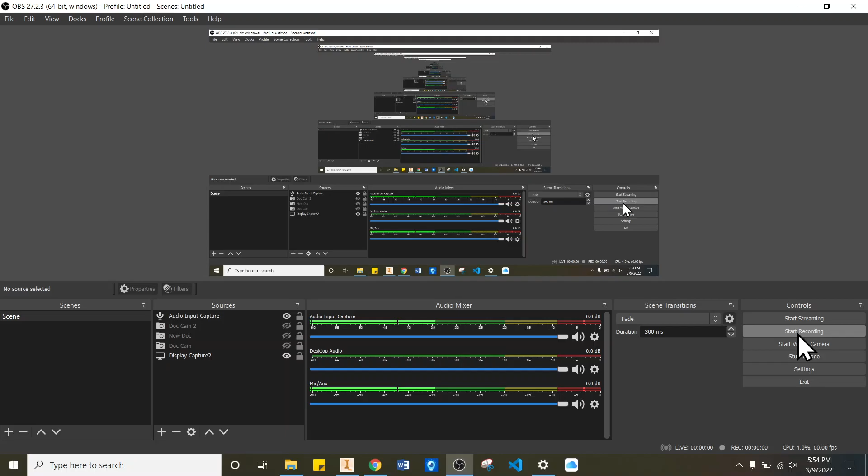Okay, so we are going to review a little bit on how to make an assembly in Inventor. First things first, when you open it up, we're going to start a new file, an assembly right here, or if you already had it open, you can go File, New, Assembly. That works too, so either way.

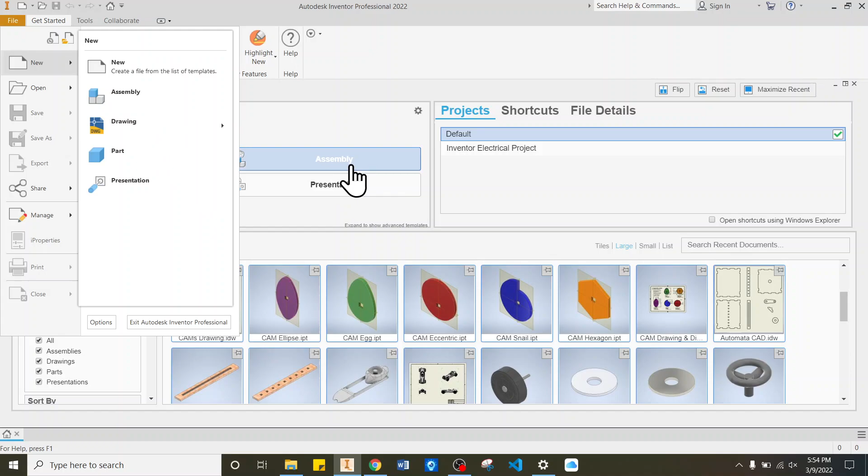Once it gets opened up, it'll take a minute the first time. Maybe more than just a minute.

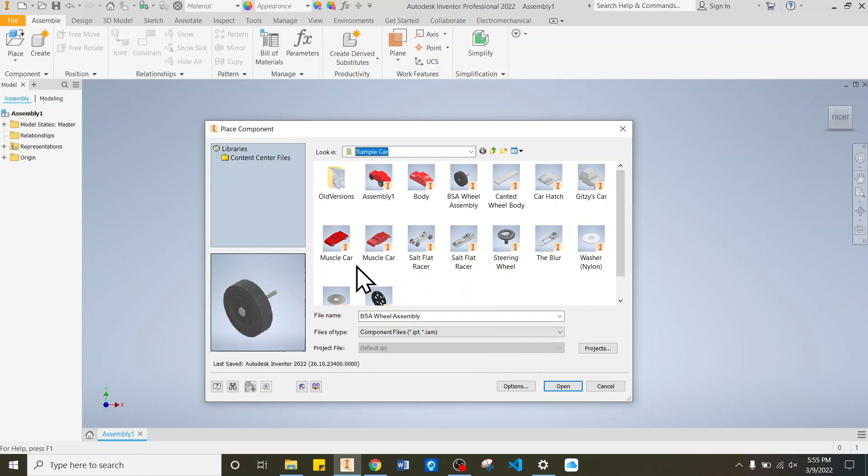Okay, so what we're going to do here is, we're in the assembly file, and we've got to put all the parts in here that we need to use. So I'm going to say Place, and I'm going to say the top one right there, Place, and it should take me to folders right here so I can find where all my parts are. I'm going to put this one together right here. It's a pretty simple one, so I'll say Open, and I can click and right click and say OK.

So that's going to drop in just this sample car. Kind of looks like Lightning McQueen a little bit. So I'm missing my axles and my tires.

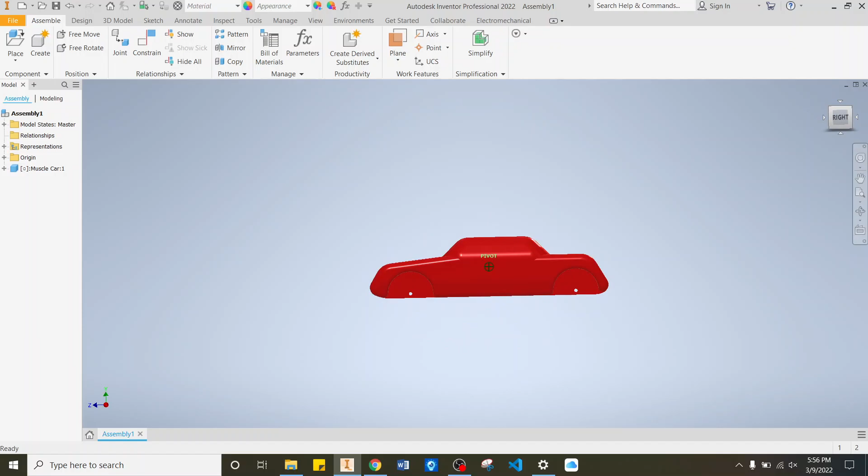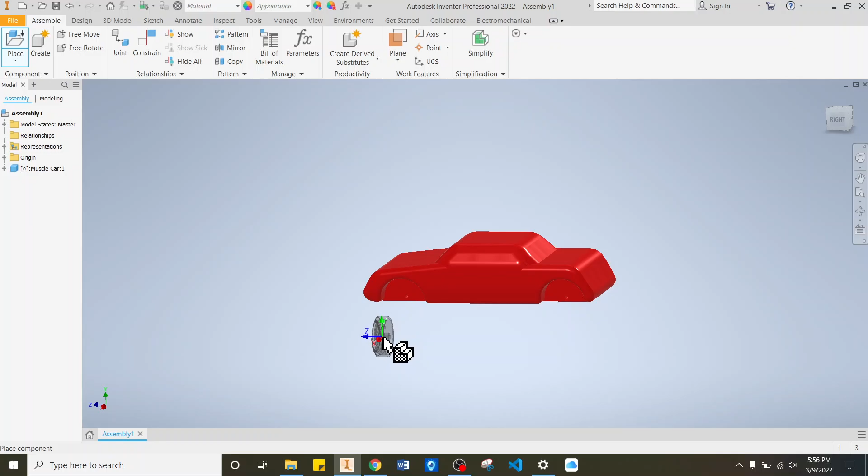So I'm going to go up here and say Place again, and I put those in another folder. I've got my standard car wheels. Most of you are going to be using the BSA wheels - these are the ones that are Boy Scouts of America, standard Pinewood Derby car wheels. I'm going to place this here, here, here, and here. Right click, OK. Then I also want to add in my axles.

So I'm going to say Place, and I want the 1-inch axle. Open. I'm going to go 1, 2, 3, 4. Right click, OK. So now I've got these wheels floating around in space with their axles.

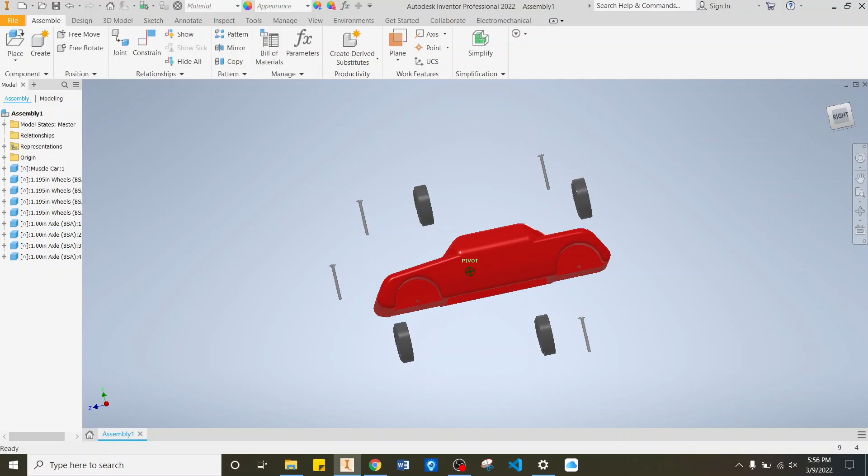What I'm going to do for each of these is insert these axles into the wheel. So I'm going to go up here to Constrain, say Insert. I'm going to zoom in, so I'm kind of looking underneath this just a little, and I want to click right there, so kind of where the flange meets the shaft there. So I'm going to click that, and I'm going to click right here.

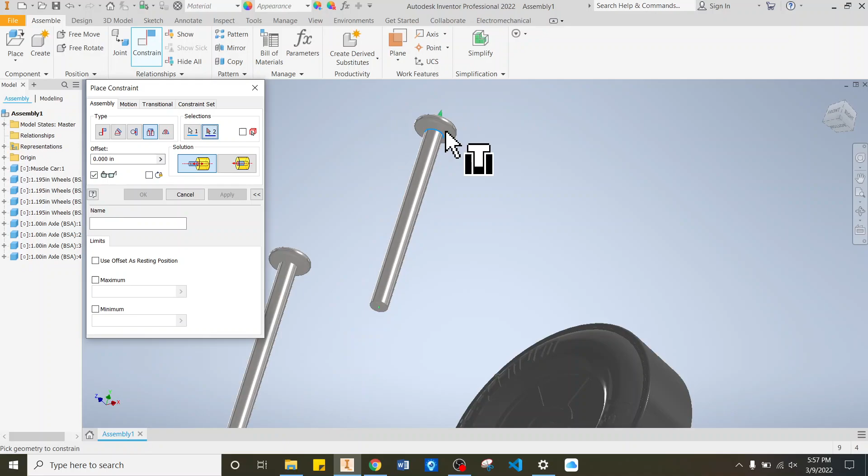Notice mine's upside down. If that happens to you, just flip it over like this, flip, and then click Apply. So there's the first one.

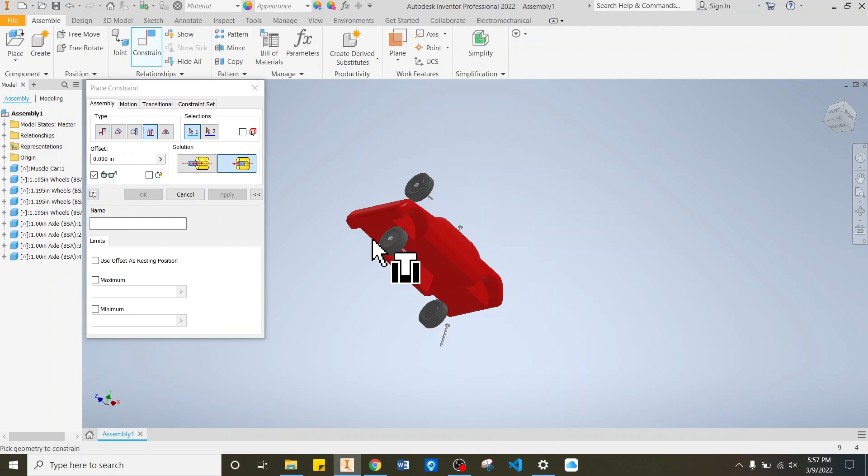I'll do this again for the second. I'm going to click right there and right here. That's good, click Apply. Then I'll go right here and right here, like that. Click Apply, and then I'll do the very last one.

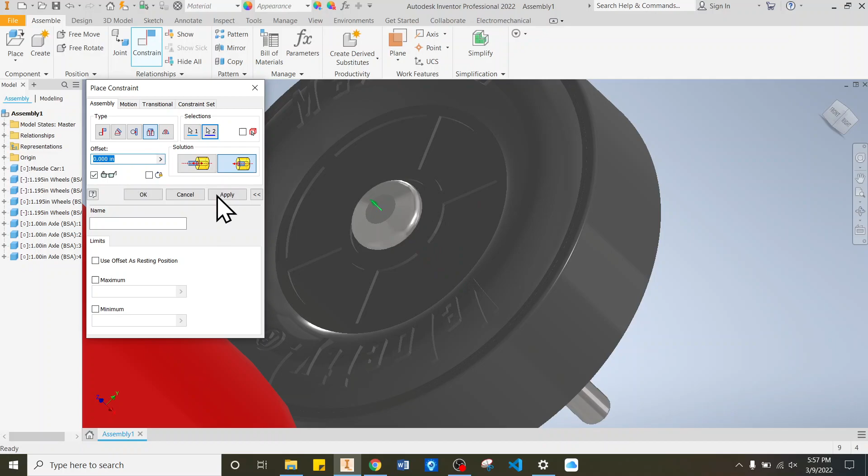So this is the fourth wheel. I'll go up here, and right there, and right here. I'll click Apply. Sweet, so we've got those 4 wheels ready to go.

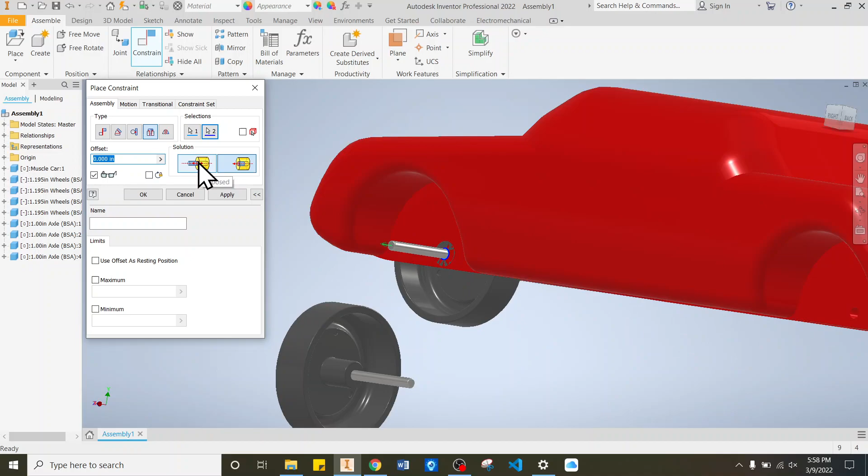Now I can put those wheels into the car. So I'm going to go up here and click - this part we've got to be careful about. I'm going to click right there, so kind of where on the tire, where that rim is. Then I'm going to come in right there and go boom, like that. Notice mine's flipped around backwards. I just flip this right here for the solution and click Apply.

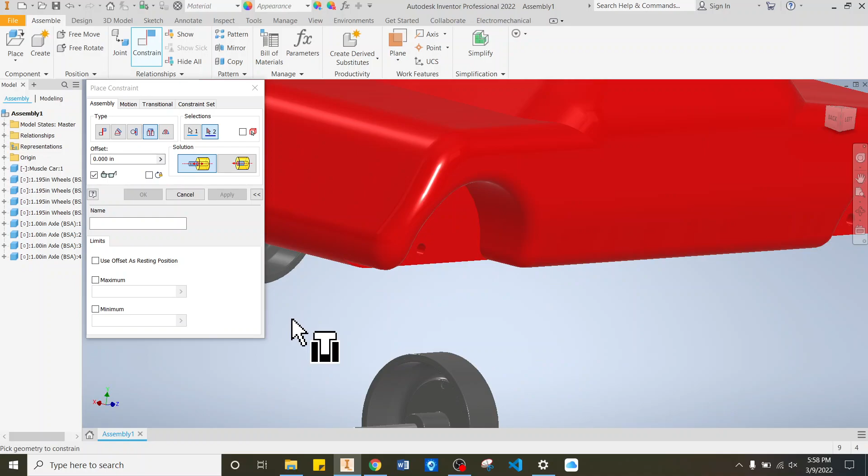And then I just repeat this for the other 3. So click there and there, and if it's backwards, you just flip this and click OK. Click that spot, rotate so I can see the other side, click right here - beautiful. Click right here and right there. Apply. Awesome.

And there you go. So once I've got that, I should have all my parts in there nice and constrained. And that's pretty much it.

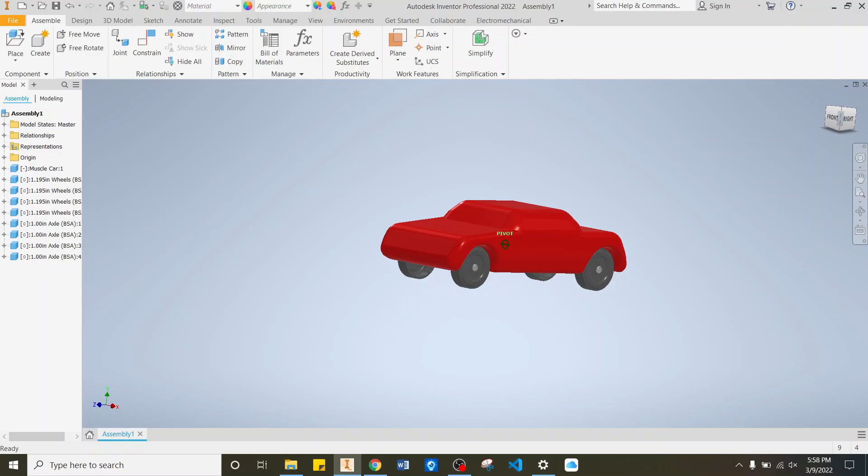So there's that part. I just hit File, Save, and I'm going to save this somewhere I can find it again - Desktop, 3D Derby, sample car, and I'll call this Ka-Chow. Oh my gosh, I don't know how to spell Ka-Chow. We're just going to say McQueen.

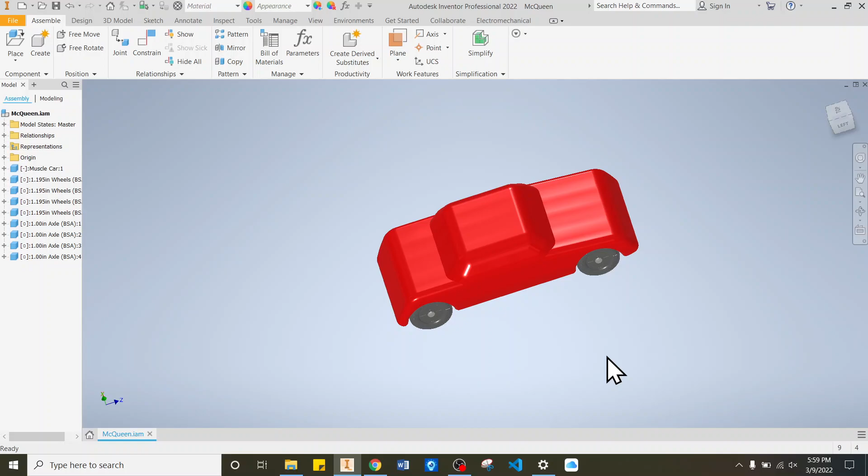There we go, Save. Alright, so once we've got that saved, next thing we want to do is - actually no, we just close out. So once you've got your assembly, that is awesome. So you can save, close it, and you're good.